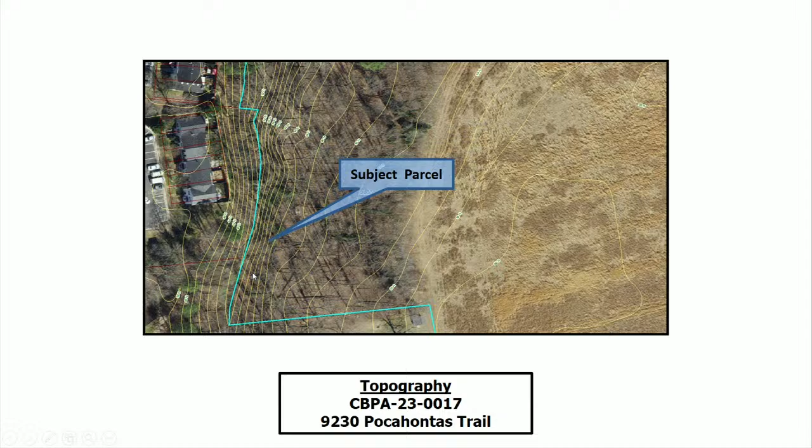Kind of zooming in a little bit on the overall parcel and scope of work here. The area in question of which will impact the RPA is in this southwestern corner here. Zooming in on the area in particular. Some topography, you can see the property line fairly well splits a stream, which is shown with the subsequent RPA shown here in blue, and the existing JCSA water line here in pink.

The total lot size of that property is 23.43 acres. However, the area designated for the proposed sanitary sewer crossing is approximately 6.92 acres, of which 10% is located within the RPA. The applicant is proposing to install a sanitary sewer connection associated with the Peninsula Pentecostals church construction.

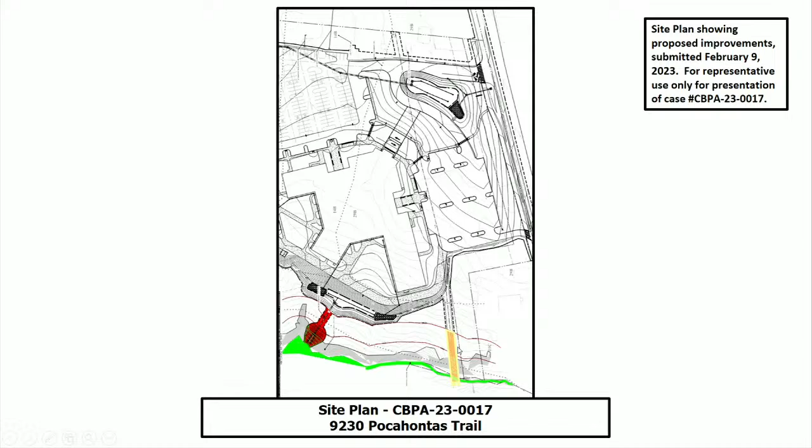Again, this is shown a little bit further up or closer here. The only portion of this proposal that is being heard before the board tonight is this section here in yellow. Required mitigation for this amount of impacts would be the recordation of a deed of natural open space for an area twice the size of the impacted area. This would equate to 3,500 square feet.

Staff has evaluated the application and exception request for the installation of a sanitary sewer. This application does meet the ordinance in sections 23-11 and 23-14, and should be heard by the board because the installation of a sanitary sewer is not water dependent and is proposed to be constructed within the RPA buffer.

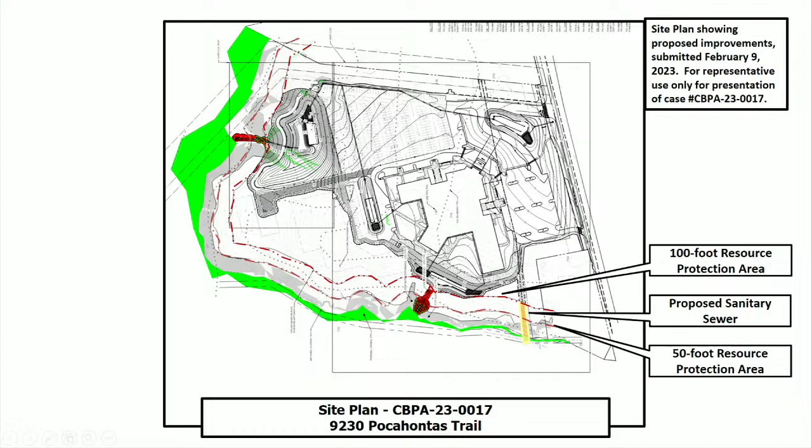Anything else? Thank you, Mr. Long. Thank you. We will open the public hearing. Would the applicant like to address the board?

Good evening, I'm Steve Romeo, VHB. Hi, Steve. Chuck, how you been? Long time.

I'm here on behalf of the Peninsula Pentecostals. Also in the audience is John McSherry, the parish administrator for the church.

Mr. O'Brien, to answer your question, the sewer will be under the creek. The sewer is deep enough that we can get under it through a directional drill. I can answer any other questions you may have, and there are no objections to anything in the staff report.

Any other questions for Mr. Romeo? Thank you. Any other questions from members of the audience?

Mr. Long has one letter as public comment that I have been requested to read into the record.

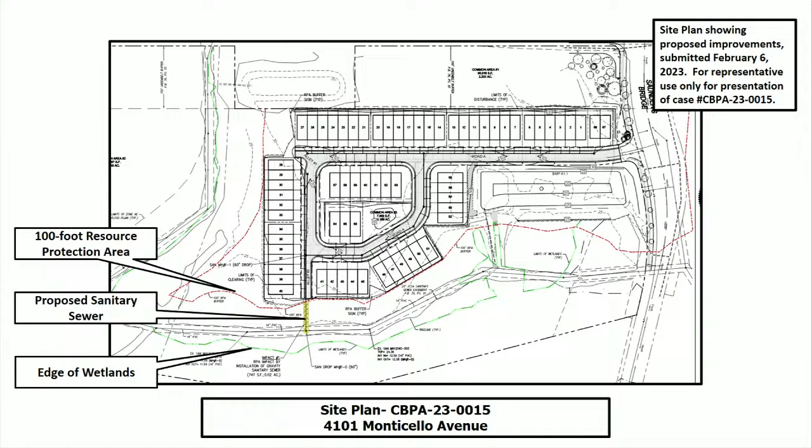Total impacts to the RPA associated with the proposal equate to 505 square feet of impacts to the landward 50-foot RPA and 242 square feet of impacts to the seaward 50-foot RPA, for a total of 747 square feet of impacts. Required mitigation for this amount of impacts is the recordation of a deed of natural open space for an area twice the size of the impacted RPA, which would equal about 1,500 square feet.

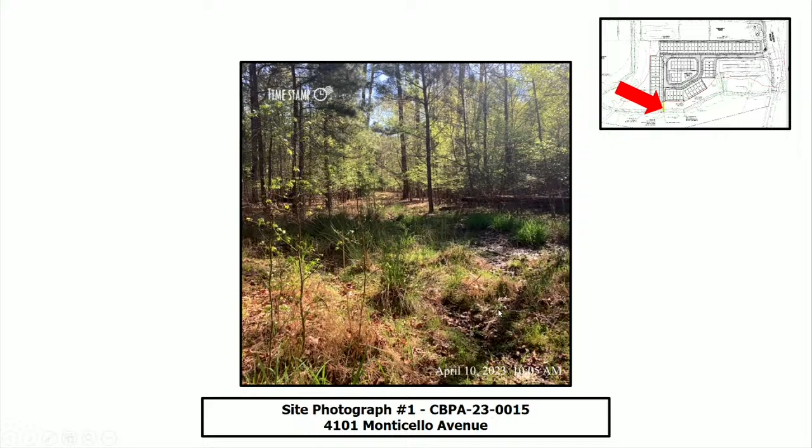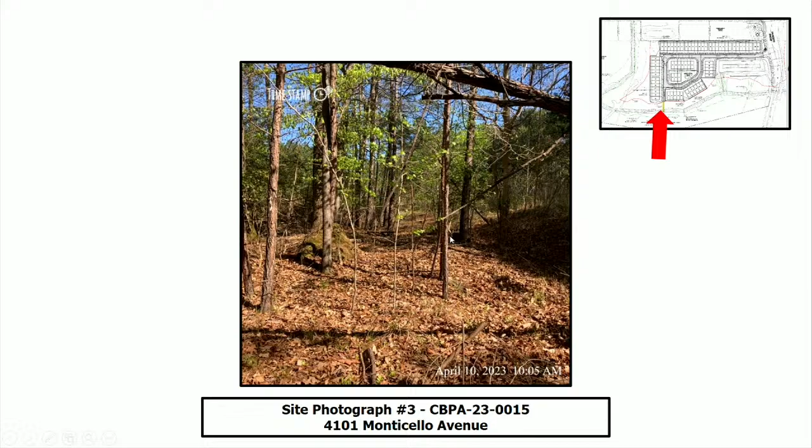Here is site photography standing in the area of the connection. This is looking back from the area towards the proposed development. And this is standing at the edge of the proposed development, just looking back towards the project area.

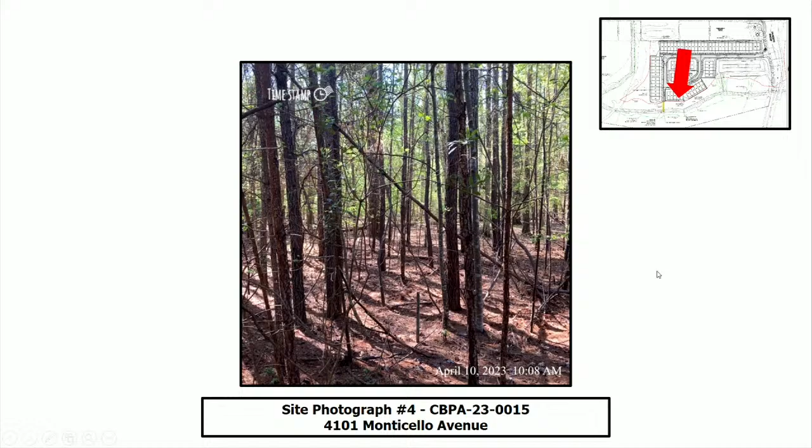Staff has evaluated the application and exception request for the installation of a sanitary sewer. This application meets the ordinance conditions in sections 23-11 and 23-14 and should be heard by the board because the installation of a sanitary sewer is not water dependent and is proposed to be constructed within the RPA buffer. The board may grant exceptions to section 23-7 if the application meets the following 5 conditions.

The exception request is the minimum necessary to afford relief. Granting the exception will not confer upon the applicant any special privileges denied to other property owners in the vicinity. The exception request will be in harmony with the purpose and intent of Chapter 23 and is not of substantial detriment to water quality. The exception request is not based on conditions or circumstances that are self-created or self-imposed, and reasonable conditions are imposed which will prevent the exception request from causing a degradation of water quality.

Staff has reviewed the application and exception request and has determined the impacts associated with this proposal to be minor for the proposed development. Staff recommends approval for this exception request, and if the board wishes to approve the request, staff recommends the following conditions be incorporated into the approval.

The applicant must obtain all other necessary federal, state, and local permits as required for the project. The applicant must record a deed of natural open space in the Williamsburg-James City County Courthouse prior to the issuance of a land disturbing permit.

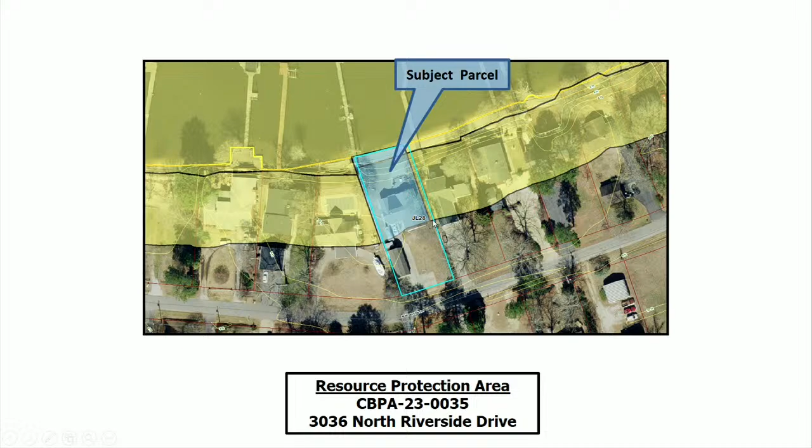The contours shown here indicate a sloping nature to the backyard going down towards the river, with the RPA shown above. Of that 0.37 acres, 54% of this property is located in the RPA, shown here in blue. The FEMA flood zones affecting this property place it within Zone AE, with base flood elevation determined at 7 feet mean sea level.

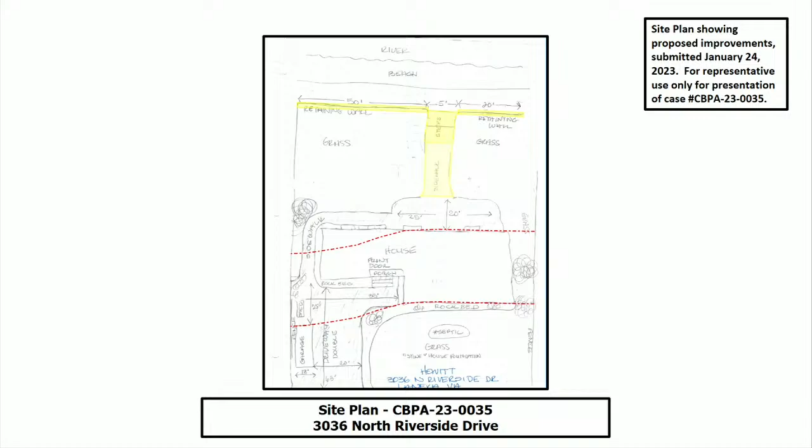The height of the retaining walls is approximately 2.8 feet. On this site plan, you can see the seaward 50-foot RPA here in red, with the river and the beach at the top of the site plan, and the 100-foot resource protection area also shown here in red.

Required mitigation for this amount of impervious impacts equals 6 shrubs.

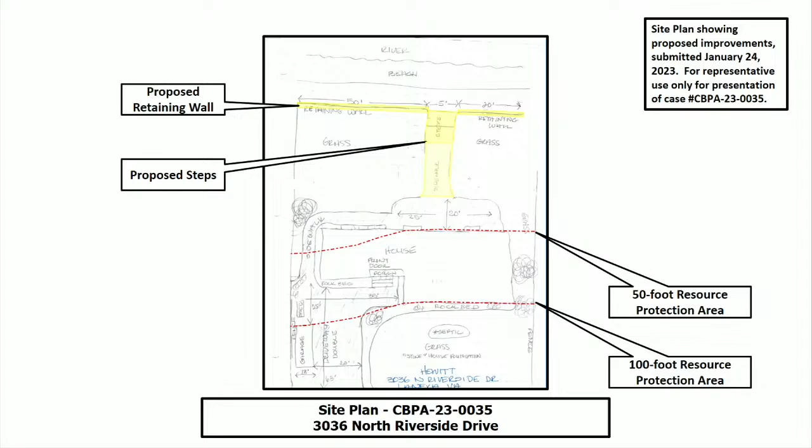And maybe you said it, but what's the purpose of the retaining wall? It was expressed to me that the purpose of the retaining wall is to mitigate erosion, but also to level out the yard. I believe the applicant is here and I'll let her or that individual speak more to that question.

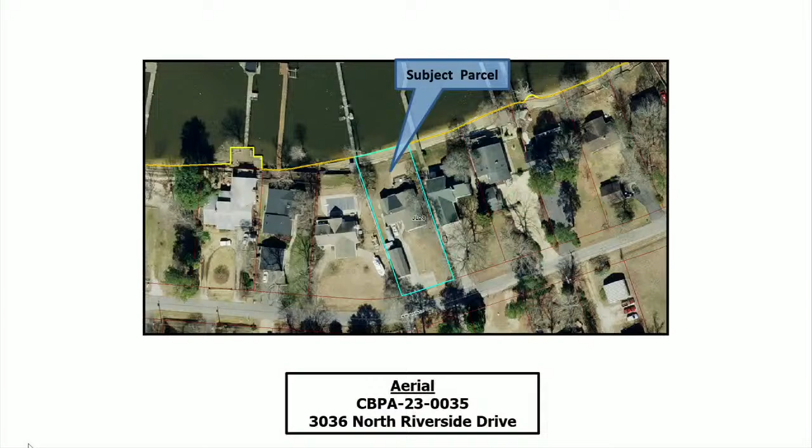Did you see evidence of erosion when you were there? Do you have pictures? There is a slope to the backyard, though there is less erosion in the upper reaches of this property than many areas. There is scouring of the beach slope here, the transition between the beach and the uplands. There is some scouring down there, though in this upper reach there is not a significant amount of erosion.

Any other questions for Mr. Long? Is the idea that there's going to be a wall that comes up and then it's going to be backfilled level? Yes, sir.

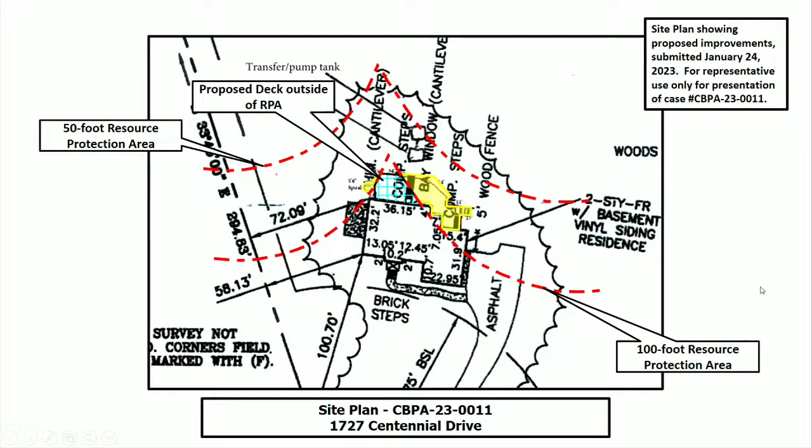Here you can see the site plan with the 50- and 100-foot resource protection areas shown in red. This blue hatched area is the proposed deck that is completely outside the RPA, and the area in yellow is the proposed deck within the landward 50-foot RPA.

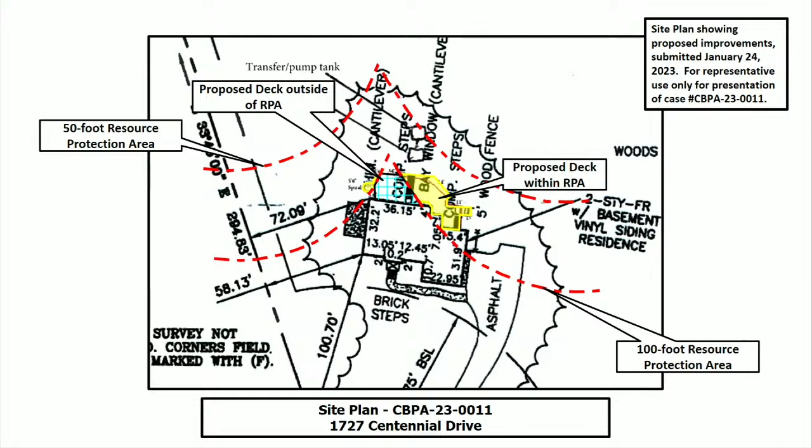Total impacts to the RPA associated with this proposal equate to 508 square feet of impacts in the landward 50-foot RPA. Required mitigation for this amount of impervious impacts equals 1 canopy tree, 2 understory trees, and 6 shrubs. Because this exception request is being heard after the fact, staff would require double the mitigation units, equating to 2 canopy trees, 4 understory trees, and 12 shrubs.

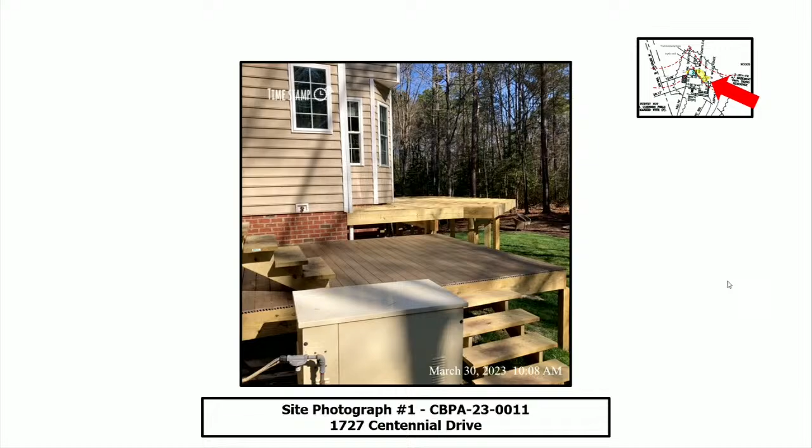Here is site photography. This is at the side of the house, a portion of the deck already constructed that continues on around the back of the home. Another view of the back of the property and the continuation of the deck as it wraps around.

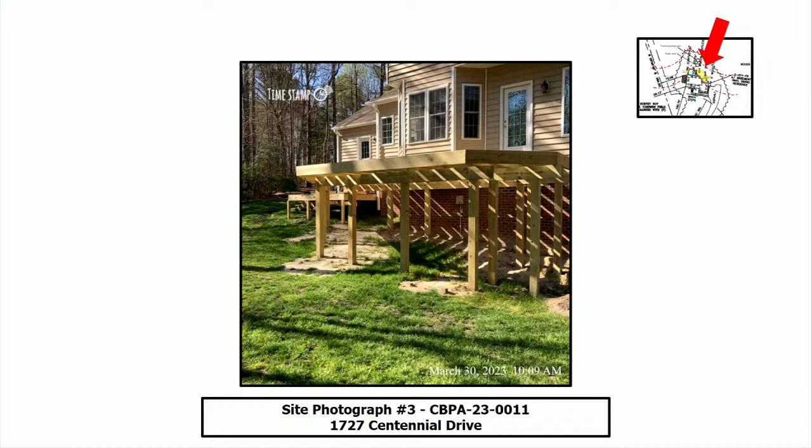And just a straight-on shot of that back portion of the deck.

Staff has evaluated the application and exception request for the construction of a deck. This application meets the ordinance conditions in sections 23-11 and 23-14 and should be heard by the board because the construction of a deck is considered accessory in nature, and this exception request is being heard by the board after the fact.

The board may grant exceptions to section 23-7 if the application meets the following 5 conditions: the exception request is the minimum necessary to afford relief; granting the exception will not confer upon the applicant any special privileges denied to other property owners in the vicinity; the exception request will be in harmony with the purpose and intent of Chapter 23 and is not of substantial detriment to water quality; the exception request is not based on conditions or circumstances that are self-created or self-imposed; and reasonable conditions are imposed which will prevent the exception request from causing a degradation of water quality.

Staff has reviewed the application and exception request and has determined the impacts associated with this proposal to be minor for the proposed development. Staff recommends approval for this exception request, and if the board wishes to approve the request, staff recommends the following conditions be incorporated into the approval.

The applicant must obtain all other necessary federal, state, and local permits as required for the project. The applicant must submit a mitigation plan equating to 2 canopy trees, 4 understory trees, and 12 shrubs to the Stormwater and Resource Protection Division prior to the issuance of a building permit. The applicant must submit a surety of $2,500 in a form acceptable to the James City County Attorney's Office to guarantee the mitigation plantings. The applicant must place 3 inches of gravel underneath the footprint of the deck.

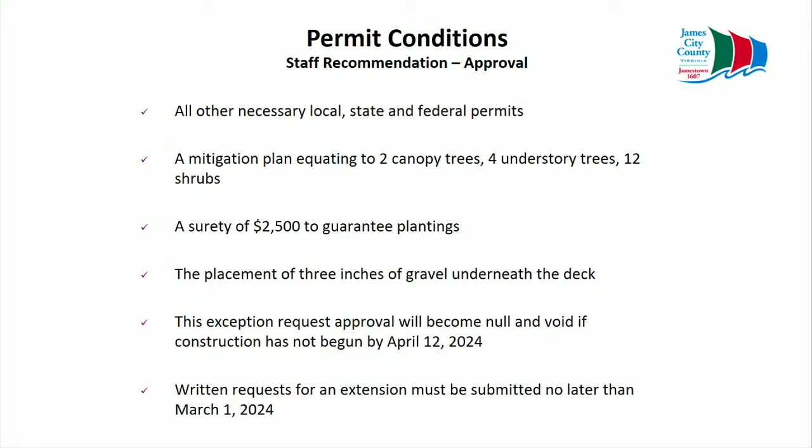If there are any questions, I'd be happy to answer them at this time. Any questions for Ms. Benedict?

Was there an existing deck prior to this? I do not believe so, but I will let the applicant confirm that. No, this is an open deck. Nothing above it. No, nothing above it.

Thank you very much. Thank you. I will open the public hearing. Would the applicant care to address the board?

Name and address, please. Good evening, Jim Fromiller, 1727 Centennial Drive. To answer your question, the house originally has 2 staircases coming straight out the back of the house. It's 2 stories in the back. One comes 16 feet just straight out the back of the house.

And the other one's about 8 feet coming straight out. None of them turn, none of them have any landings, which makes it difficult for me. I have knee replacements, bad hip. It just makes it hard to get out, that many stairs coming straight out. So that's one of the reasons.

Obviously, it would be nice to have a deck. And then I was going to put the staircase down at the low end, so I don't have that many stairs to go up and down, and replace those stairs, because those long stairs were unsafe to get up and down. To answer that.

And then there was another question, if it was an open deck. Yeah, totally open, just to connect the 2 staircases and have one set of steps to get up and down.

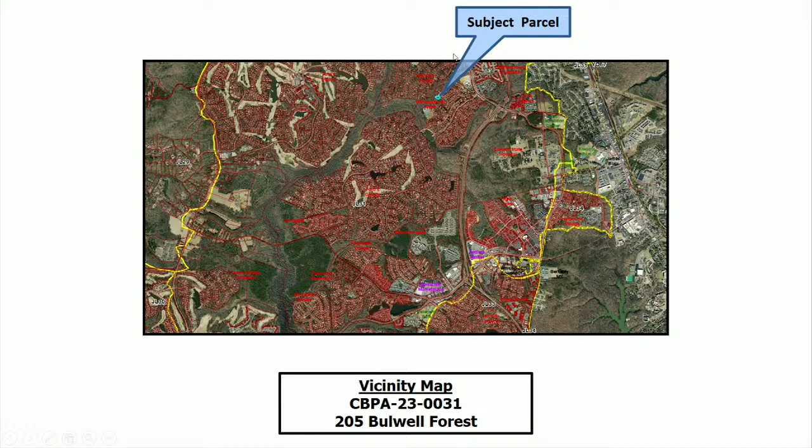This can be seen above on your screens, the parcel outlined here in blue with the watershed divide here in yellow. Again, this is within the Fords Colony subdivision. The total lot size of this property is 0.69 acres. The property itself is shown above as a flag lot that extends down into these woods here. Contours of this property include a fairly sloping nature down towards the rear of the property, of which wetlands can be found adjacent and on property.

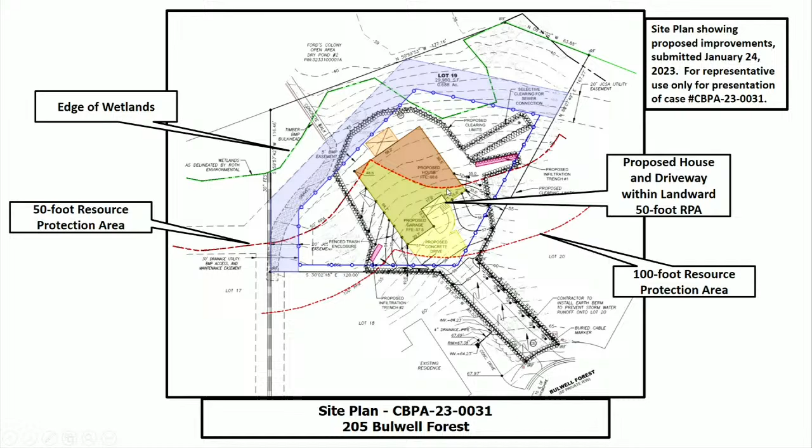The area highlighted here in yellow indicates the portion of this proposal which is occurring within the landward 50-foot RPA, and the area in orange being within the seaward 50-foot RPA.

The minimum first floor square footage required for this section of Ford's Colony is 2,000 square feet. The proposed house has a first floor square footage of 2,558 square feet, which is 28% larger than the minimum requirement. Required mitigation for this amount of impervious impacts equals 11 planting units, which equates to 11 canopy trees, 22 understory trees, and 66 shrubs.

The applicant is proposing to plant 7 planting units and purchase the remaining 4 credits through the James City County Mitigation Fund at a cost of $3,000.

Additionally, there are 2 proposed infiltration trenches, which can be seen above, highlighted in pink. The first one is located in this region, and the second, the smaller of the two, is located in the southwestern portion of this property.

We have highlighted the building setback lines here in blue for your reference. Additionally, the clearing above the larger of the 2 infiltration trenches is for the sanitary sewer line, which was shown on the screen earlier. And the limits of clearing are indicated here in this black squiggling line.

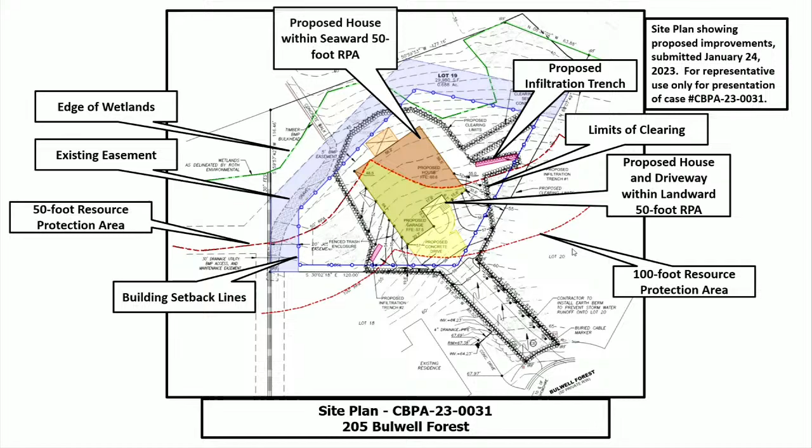The mitigation plan, as it has been provided, again includes the 2 infiltration trenches that are proposed, and then these 7 planting units as shown on the screen above.

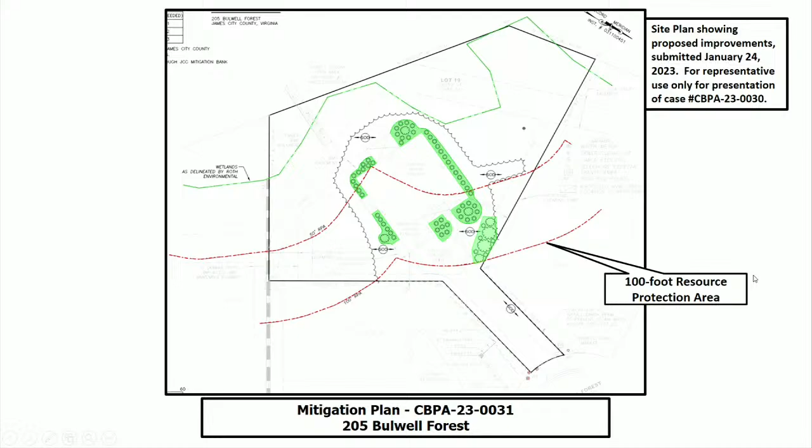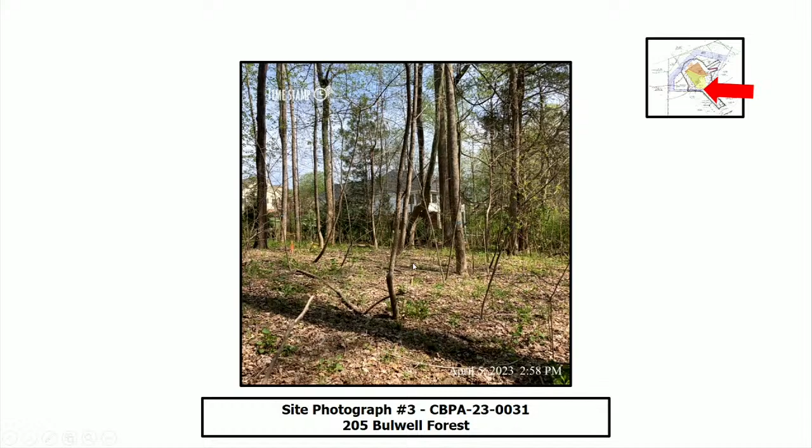And looking down towards the wetlands, that BMP you can see in this picture is located right here.

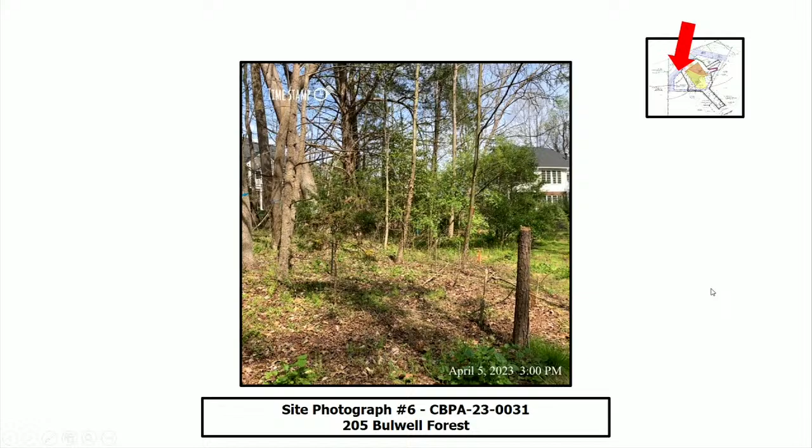Standing at the very, very back of the property, looking back up towards, straight line through the house and through the driveway as a whole.

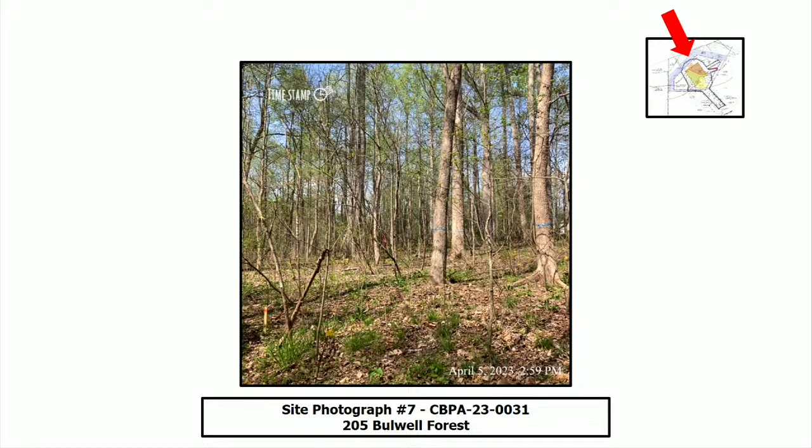Staff has evaluated the application and exception request for the construction of a single-family dwelling. The application does not meet the ordinance conditions in sections 23-11 and 23-14 and should be heard by the board because the construction of the single-family dwelling extends into the seaward 50-foot RPA.

Staff notes the board may grant exceptions to section 23-7 if the application meets the following 5 conditions. The exception request is the minimum necessary to afford relief.

Granting the exception will not confer upon the applicant any special privileges denied by Chapter 23. The exception request will be in harmony with the purpose and intent of Chapter 23 and is not of substantial detriment to water quality. The exception request is not based on conditions or circumstances that are self-created or self-imposed, and that reasonable and appropriate conditions are imposed which will prevent the exception request from causing a degradation of water quality.

Staff has reviewed the application and exception request and has determined the impacts associated with the proposal to be minor for the proposed development. Staff recommends approval for this exception request, and if the board wishes to approve this request, staff recommends the following conditions be incorporated into the approval.

The applicant must obtain all other necessary federal, state, and local permits as required for the project. The applicant must submit a surety of $5,250 in a form acceptable to the James City County Attorney's Office to guarantee the mitigation plantings of 7 planting units.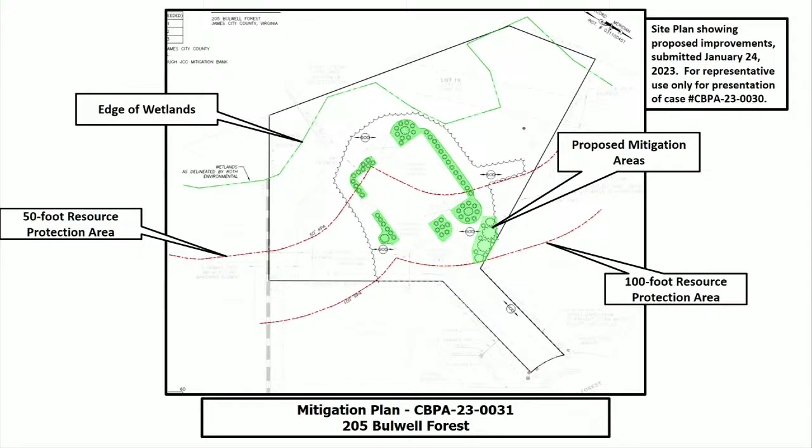And the reason I asked the question, I'll give you a little time, is part of the issue with these types of lots in the county is that some of them were not encumbered with the Bay Act when it was passed, and then through subsequent interpretation of the act, lots that had been platted are now subject to something that didn't exist when the lot was put to record. So in this case, I'm curious if this lot falls into that category of lots adversely affected by changes in the regulation, or whether it would have been considered an RPA feature at the time.

Any other questions for staff? Thank you, Mr. Long. I will open the public hearing. Would the applicant like to address the board?

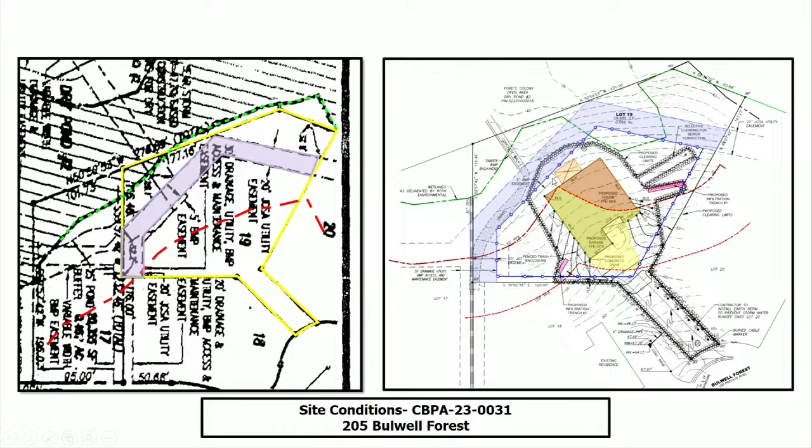And I guess I'll add, even swinging it more to the left doesn't alleviate, we're still 100% in the RPA, so it doesn't alleviate impacts. The question was more to reduce the seaward 50-foot encroachment, but yeah.

Thank you, sir. Thank you. Anybody else like to speak on this matter? I will close the public hearing. The matter is, bless you, the matter is before the board. Bless you.

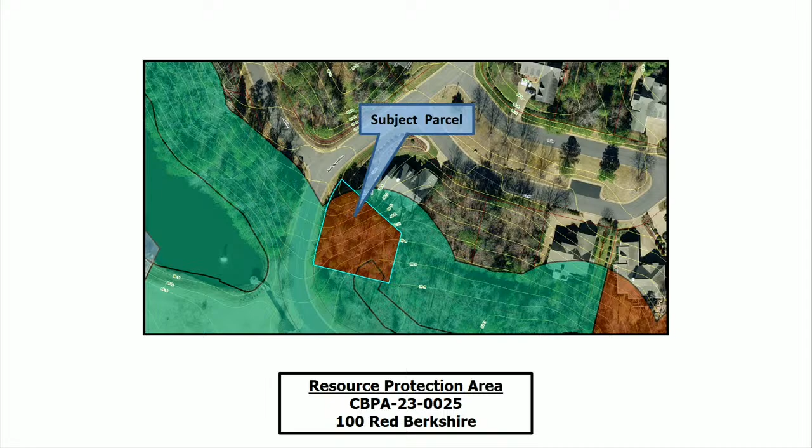Existing conditions on this property include a wooded lot with wetlands on the rear of the property. The applicant is proposing to construct a single-family dwelling with a deck.

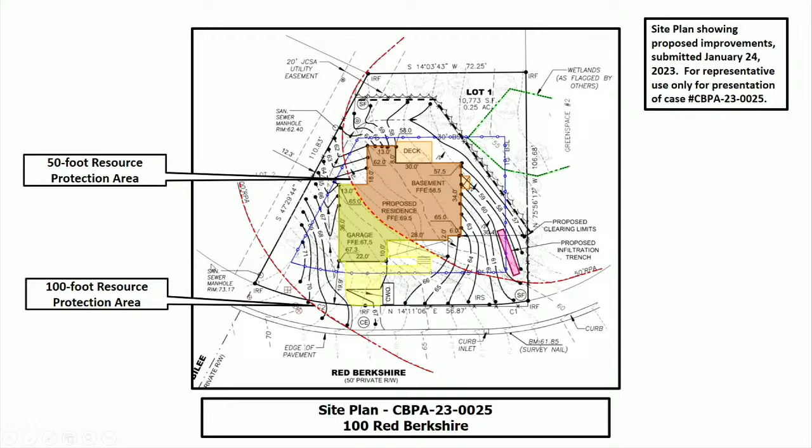Here in red is the 100-foot resource protection area. The edge of wetlands is shown here in green. The area of the home and deck within the seaward 50-foot RPA is shown in orange, and the area of the driveway, garage, and home within the landward 50-foot RPA is shown in yellow. Additionally, the building setback line is shown here in blue, and the limits of clearing shown around the edge in this sort of wavy line, as well as an infiltration trench on the eastern portion of the property.

Total impacts to the RPA associated with this proposal equate to 1,289 square feet of impacts to the landward 50-foot RPA and 1,794 square feet of impacts to the seaward 50-foot RPA, for a total of 3,083 square feet of impacts.

The minimum first floor square footage required for this section of Ford's Colony is 1,700 square feet. The proposed first floor square footage for this home is 1,705 square feet.

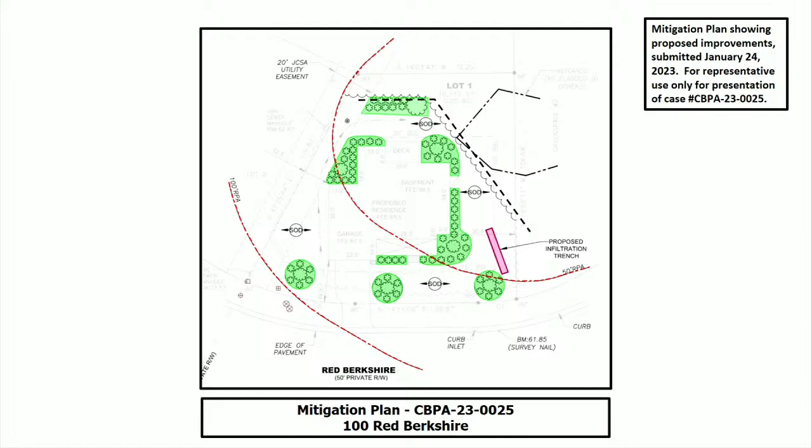Required mitigation for this amount of impervious impacts equals 8 planting units, which is 8 canopy trees, 16 understory trees, and 24 shrubs, which the applicant has provided in the mitigation plan you see on the screen right now, showing the areas in green being that proposed mitigation.

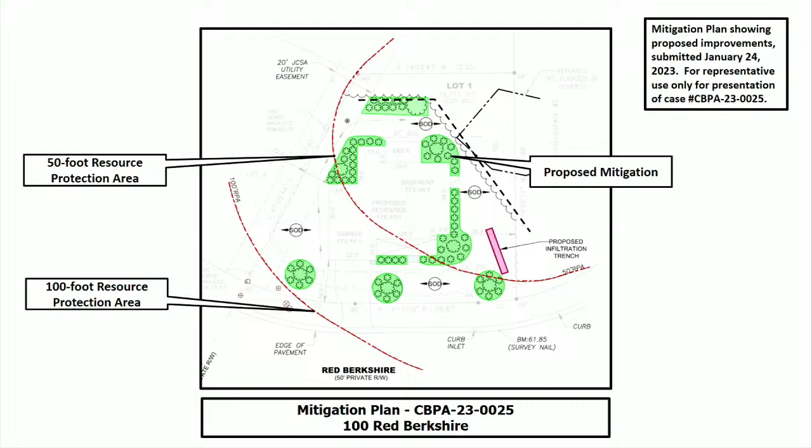The applicant has also proposed the infiltration trench on this property. Staff is requesting that an affidavit be recorded in the Williamsburg-James City County Courthouse because of the environmental sensitivity of this lot.

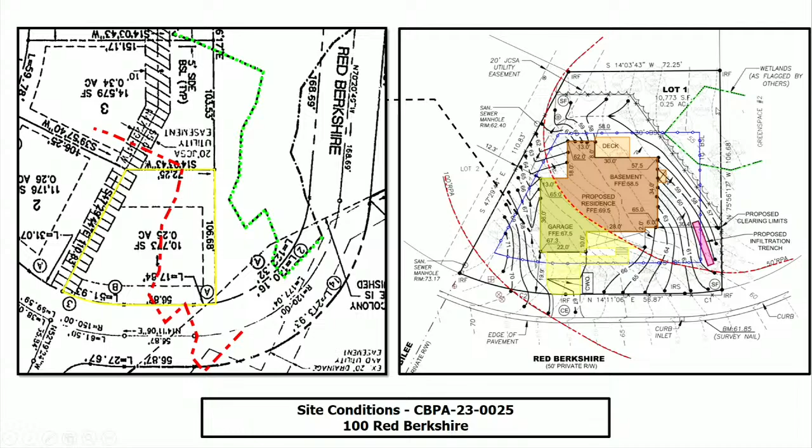Staff has evaluated the application and exception request for the construction of a single-family dwelling with a deck. This application meets the ordinance conditions in sections 23-11 and 23-14 and should be heard by the board because the construction of the single-family dwelling extends into the seaward 50-foot RPA.

The board may grant exceptions to section 23-7 if the application meets the following 5 conditions. The exception request is the minimum necessary to afford relief. Granting the exception will not confer upon the applicant any special privileges denied to other property owners in the vicinity. The exception request will be in harmony with the purpose and intent of Chapter 23 and is not of substantial detriment to water quality. The exception request is not based on conditions or circumstances that are self-created or self-imposed, and reasonable conditions are imposed which will prevent the exception request from causing a degradation of water quality.

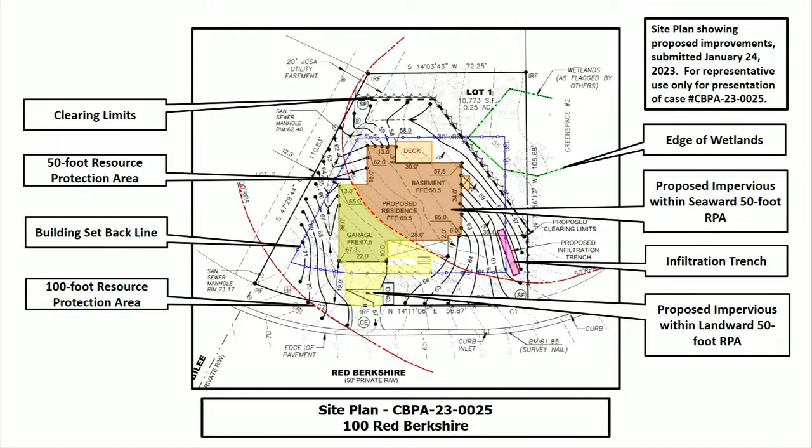Any questions for Mr. Grogg?

I appreciate your attention to the items that we'll ask questions about and the addition of the infiltration. I don't know that any of us are particularly thrilled with these infill lots, but I appreciate your attention to the details. Thank you.

No questions? Thank you. Anybody else care to address this matter before the board? Hearing none, I will close the public hearing. The matter is before the board.

So with these lots platted in 1990, I get it, the wetlands change. But in this case, Mr. Grogg's done his due diligence. This one seems to address the majority of our concerns. It is the minimum, and he's made the effort to meet the board halfway, so that way the lot still can be responsibly developed. So I have no objections to this proposal.